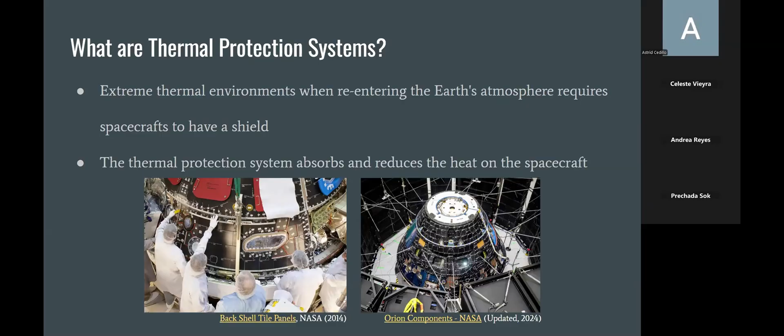Robert Goddard developed the concept of a heat shield in the late 1920s after observing the behavior of meteors entering the Earth's atmosphere. Around World War II, various countries tried to create long-range missiles and rockets capable of leaving the atmosphere and re-entering. Many tests happened on different rockets, but they could never re-enter the atmosphere due to high speeds and intense heat. The failure of these vehicles was also due to hypersonic speeds, shock waves in the shock layer, and drag force.

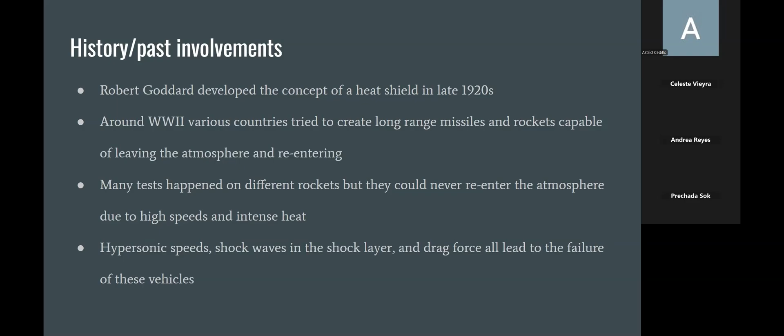So to continue on the past history of the thermal protection system, in the late 1950s, Von Karman created the term thermal barrier and thought they had no materials at the time to stop vehicles from heating. Various thermal protection systems had been developed during the space race, and effective technologies have been new materials, accurate sensors, and effective modeling tools.

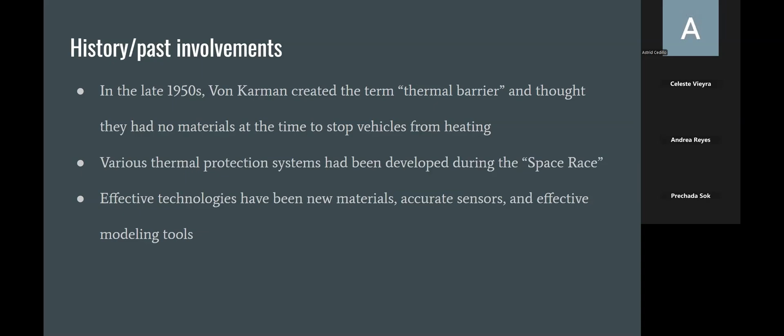There are three types of thermal protection systems: the passive method, the semi-passive method, and the active method. Down below, there's a chart that shows what falls under these methods. For the passive method, you have the heat sink, the hot structure, and the insulated structure. In the semi-passive method, you have the heat pipe and ablation. And then for the active method, you have transpiration cooling, film cooling, and convective cooling.

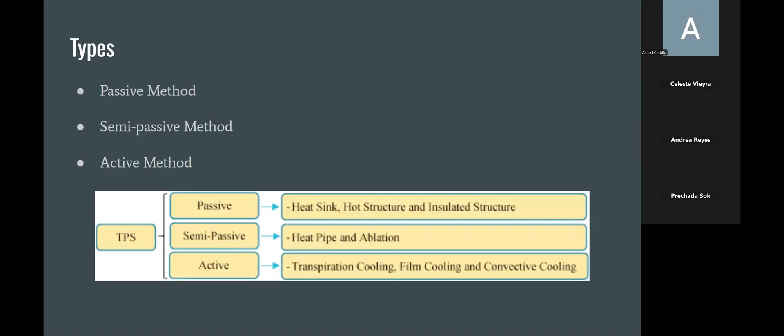Now, the passive method can be a heat sink, hot structure, or insulated structure, and they're normally used for small heat pulses. The heat sink is a metal structure with high heat storage capability, and it's generally used for short heat pulses. The hot structures allow effective re-radiation when the surface temperature reaches a certain level due to high emissivity. Heat pulse here is not a concern. And the third would be the insulated structures that have an outer layer that reflects heat and an inner ceramic fiber layer that slows heat transfer.

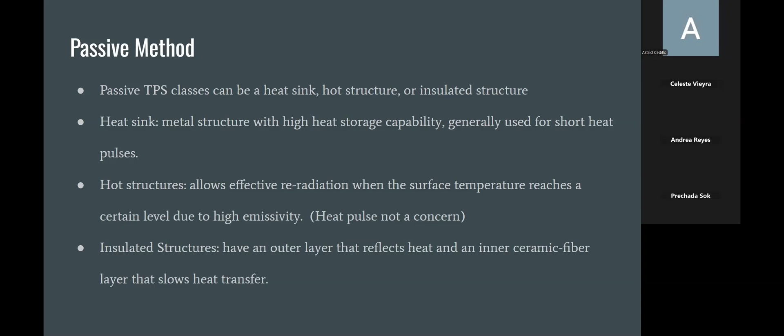Now here is shown what falls under these structures. In the first photo, you have a heat sink that's used for the GE MK2 re-entry vehicle. As shown in each photo, you can see the surface heating entering those structures and the radiation coming out of it, as well as the connection of each vehicle structure. In the second photo, you have the hot structure, which is used in the wings of the X-15, made from Inconel X. And in the third photo, you have an insulated surface used on the space shuttle orbiter, and as you can see, it has an insulation that slows the heat transfer.

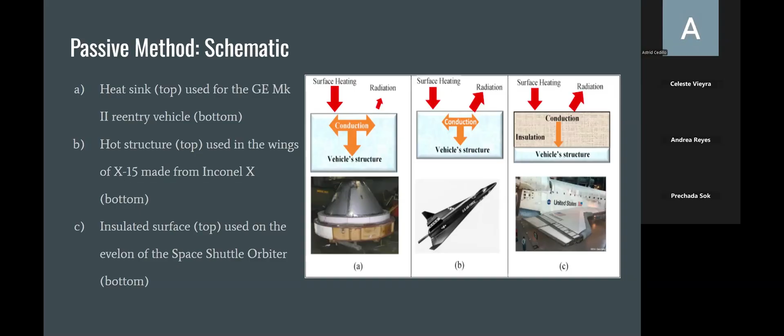Moving on to the semi-passive method, there are two ways to cool down a vehicle, using heat pipes and ablative surfaces. This picture below shows a simple diagram of how both of these methods work. Heat pipes are used to dissipate heat by phase change, while ablative surfaces carry heat away using two methods, ablation or pyrolysis. Ablation focuses on eroding or vaporizing a material surface caused by high temperatures, while pyrolysis relies on decomposition from high temperatures without using any oxygen.

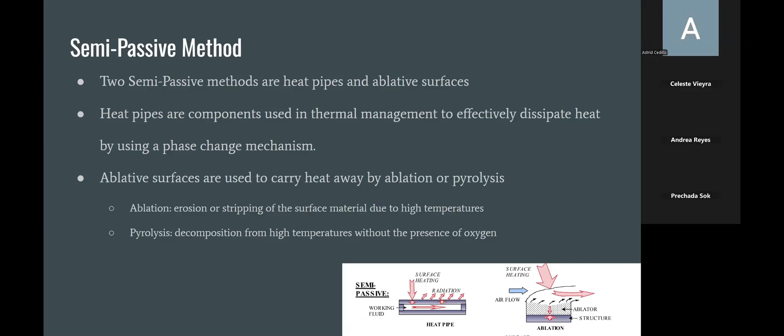Heat pipes distribute heat through phase change. The diagram off to the side shows the heat source from the far left evaporating the fluid, creating a pressure gradient. As the fluid turns into a vapor, it will move on to the cooler sections of the heat pipe. This cooler section causes the vapor to turn back into a liquid through condensation, where heat flux is released outside of the heat pipe. However, a disadvantage of heat pipes is that extremely high heat fluxes can cause permanent damage to the heat pipe in a process known as dry out. There are three circumstances that cause dry out: boiling, capillary, and the sonic limit.

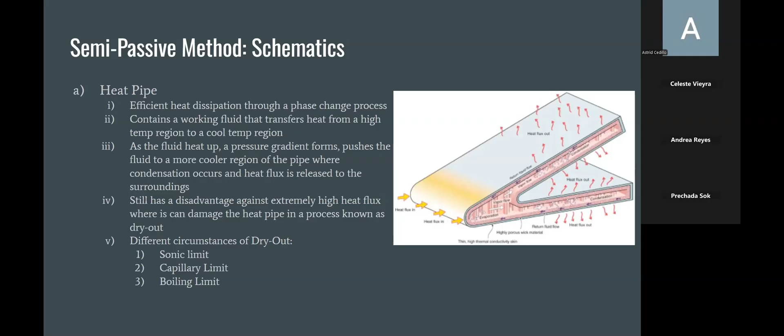Made of composite materials such as carbon, glass, or organic polymers, these ablative materials will react with gases or flux to oxidize, melt, or sublimate.

Hot gases, radiant flux, or boundary shock layer heat the surface of an ablative surface. As the polymer decomposes, it leaves a char layer, where pyrolysis gases are formed. The boundary layer thickens as a result of the pyrolysis gases as it passes through. This reduces the convective heating.

There are multiple types of surface removal: melting or fusion, vaporization, oxidization, sublimation, or spallation. An application of ablative surfaces was used during the Apollo command missions. NASA used a honeycomb structure made of steel, fiberglass, and epoxy resin as the heat shield for these missions.

The shell of fiberglass vaporized or ablated as the vehicle re-entered the atmosphere, which prevented the heat coming through the crew compartment.

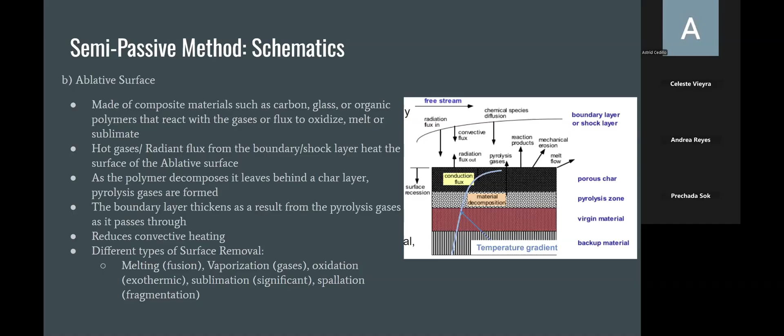Moving on to the active methods, the first one is radiative cooling, which uses thermal radiation of materials in high temperature conditions. And this method's requirements are strict and the amount of heat dissipated is very small. So this method isn't as effective and is not suitable for high wall heat loads.

The second method is film cooling, which has two categories: liquid film cooling, which has poor stabilization when used for high-speed environments, and gas film cooling, which is more common for hypersonic vehicles, because the heat insulation is usually used for low to medium speeds, and it has a simple structure with high performance.

The third one is transpirative cooling or transpiration cooling, where the heat insulation method has a high cooling performance because the inflow air or the fuel could be used as a coolant. With this method, it has two disadvantages since it'll impair the engine performance and it is a more complicated structure, so it could lead to low structure reliability.

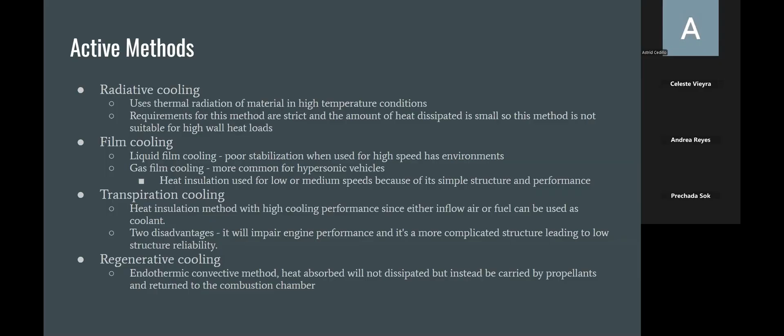For the thermal protection system protocols, it starts off with the thermal protection systems development for entry, descent, and landing. This is the design, analysis, and testing of the system. So they start to analyze simulations, do independent modeling and model validations at this stage, and they make sure that it's up to standards or at the right specifications.

To the right is an example of one of the analyses that they do for lift to drag of different vehicles, since the lift to drag is a very important component of thermal protection systems.

The second step in thermal protection systems is the facility, and this is where the materials are manufactured, installed, and repaired. This facility provides the ovens for heat cleaning, sintering, and waterproofing the materials used to make the systems.

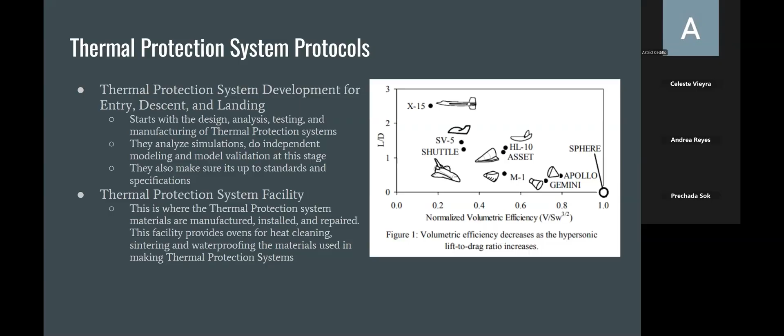The third step in this is the charring ablator response. This is where the facility supports the vehicle designs, ground testing, and flight data analysis. It is used to simulate reusable and ablative thermal protection systems.

And the last step is the actual testing in the radiant heating test facility. This is where they test the capabilities of the thermal protection system and simulate the heating experienced by spacecraft entering the atmosphere in a controlled environment. They simulate the entry thermal profiles, thermal gradients, and pressures.

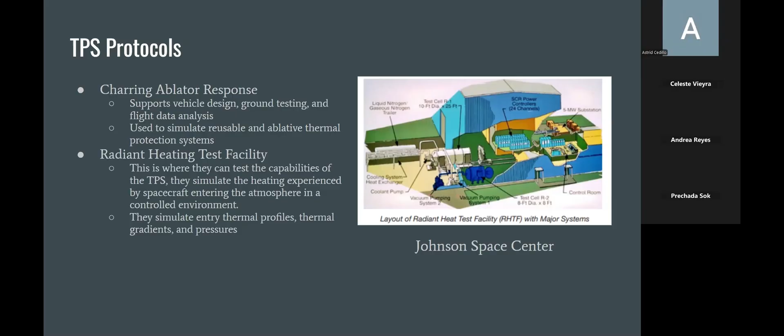To the right is the layout of a radiant heat test facility at the Johnson Space Center. Right. To reiterate, thermal protection systems are crucial for rocket design and mission retrievals. These systems provide safety for rockets to re-enter our atmosphere.

First introduced in the 1920s and successfully developed in the 1950s during the space race, thermal protection systems are a crucial subject when it comes to exploring space. Thermal protection systems are differentiated by three different types, which are the passive method, semi-passive method, and the active method.

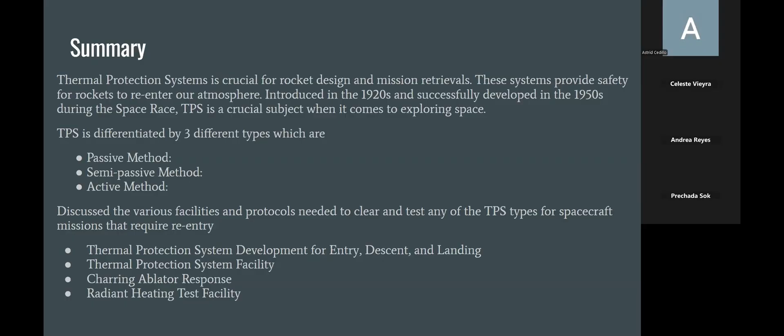And we discussed the various facilities and protocols needed to clear and test any of the thermal protection system types for spacecraft missions that require re-entry. These are the thermal protection system development for entry, descent, and landing, the thermal protection system facility, the charring ablator response, and the radiant heating test facility.

Here are references. One of them is from NASA, and the other one is a research paper discussing everything about the thermal protection systems.

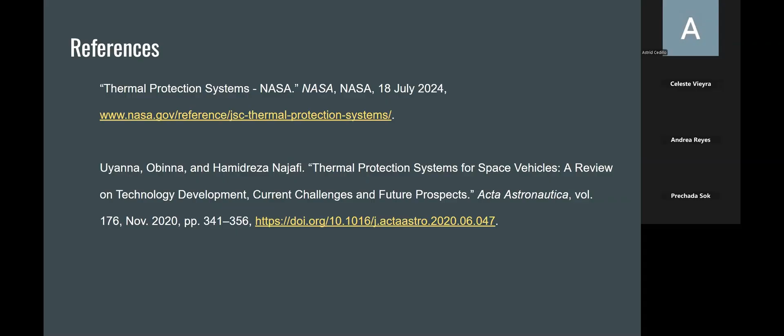Okay, that was my bad. I thought you were just gonna say these are references. It's okay.